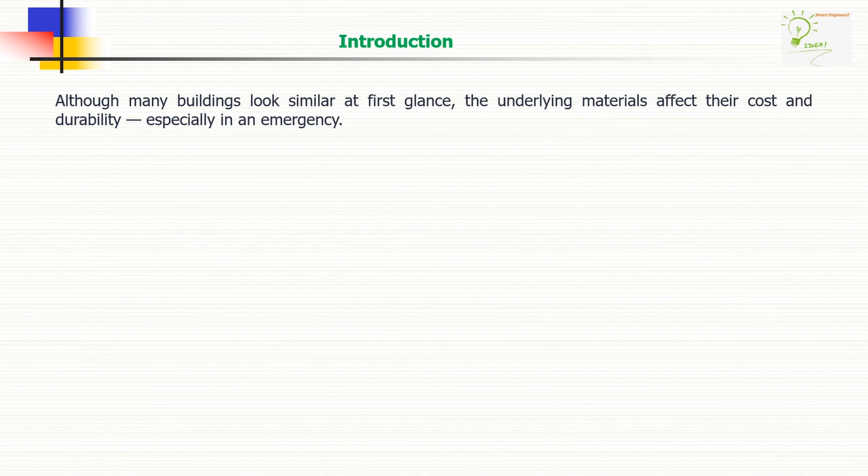Introduction. Although many buildings look similar at first glance, the underlying materials affect their cost and durability, especially in an emergency.

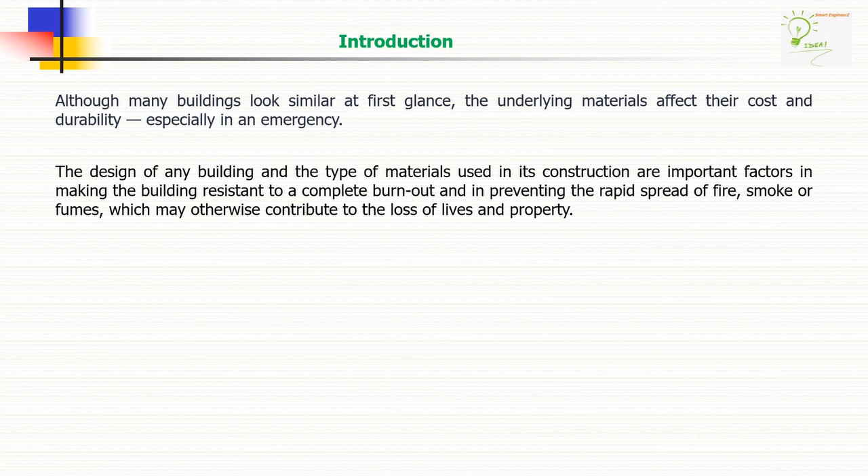The design of any building and the type of materials used in its construction are important factors in making the building resistant to a complete burn out and in preventing the rapid spread of fire, smoke, or fumes, which may otherwise contribute to the loss of lives and property.

The types of construction according to fire resistance are classified into four categories, namely Type 1, Type 2, Type 3, and Type 4 construction. The fire resistance ratings for various types of construction for structural and non-structural members should be as given in Table 1.

Indian National Building Codes, earlier 2005 and subsequent 2016 revisions, and respective Code of Practice, that is IS 1642:1989 reaffirmed 2000, classify all structures from type 1 to type 4, and this building type reveals crucial information such as fire resistance rating, that is FRR.

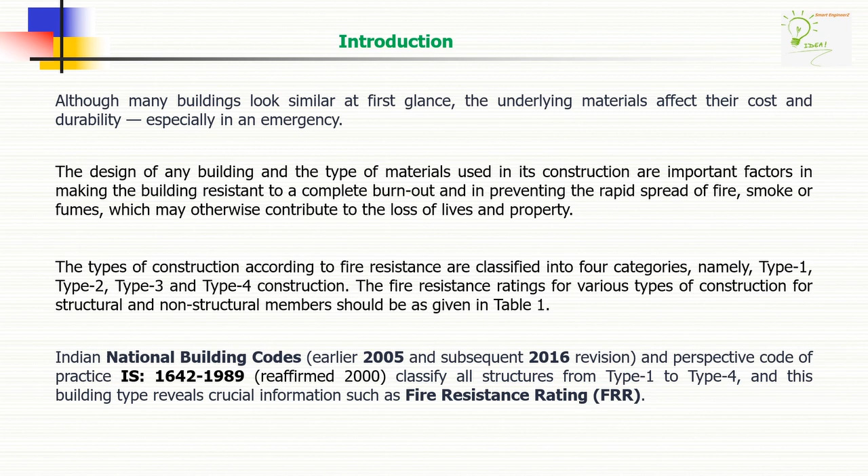This code, part 4, deals with safety from fire. It specifies the demarcation of fire zones, restrictions on construction of buildings in each fire zone, classification of buildings based on occupancy, types of building construction according to fire resistance of the structural and non-structural components, and other restrictions and requirements necessary to minimize danger to life from fire, smoke, fumes, or panic before the buildings can be evacuated.

The code recognizes that safety of life is more than a matter of means of egress and accordingly deals with various matters which are considered essential to the safety of life.

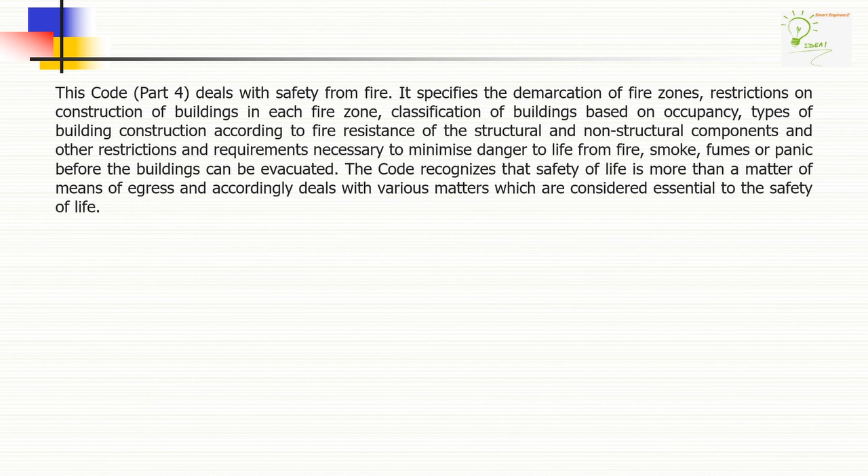But the most surprising and unfortunate fact is that though the NBC and respective code of practice has been rolled out approximately 18 years or more till date, the awareness is not there with concerned parties, that is architects, consultants, engineers, developers, and other associated stakeholders.

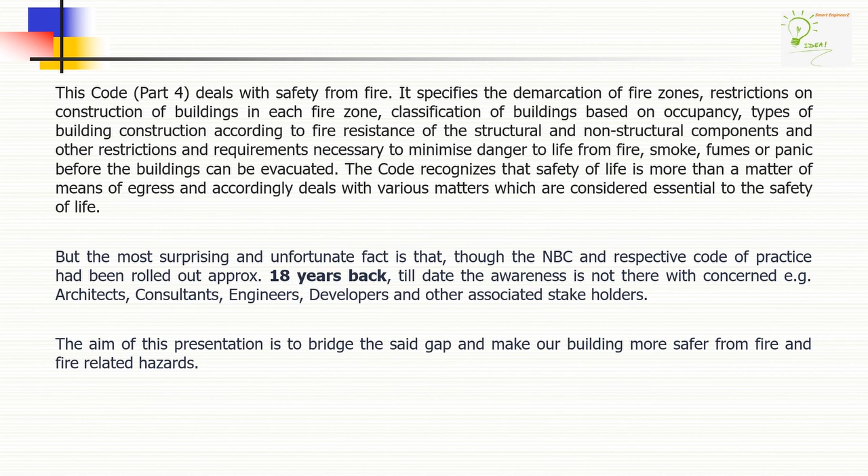The aim of this presentation is to bridge the said gap and make our buildings more safer from fire and fire related hazards.

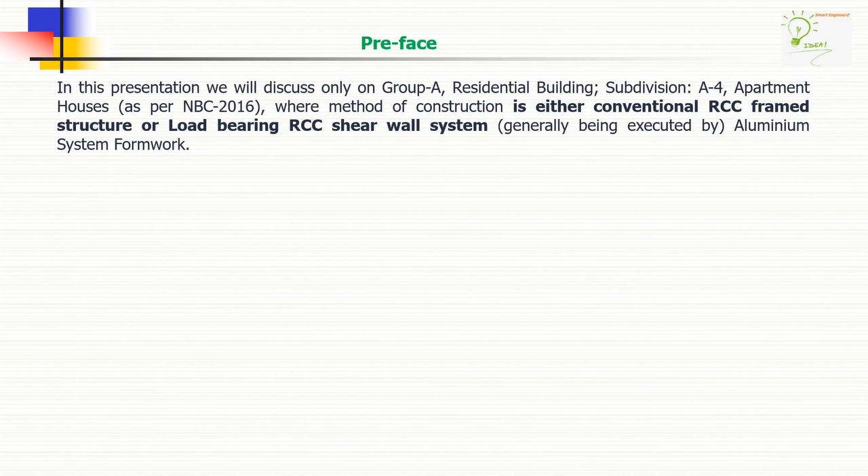Preface. In this presentation, we will discuss only Group A, that is residential building, and its subdivision A4, that is apartment houses, as per NBC 2016, where the method of construction is either conventional RCC frame structure or load-bearing RCC shear wall system, generally being executed by aluminum system formwork.

This presentation is focused mainly on the minimum dimension required for RCC structural members with their cover requirements for Type 1 construction. Other architectural, structural, building services and interiors related requirements, please follow respective sections or codes of practice.

Please note, while studying, few anomalies observed between above references. However, preference given to NBC 16 over other codes of practice.

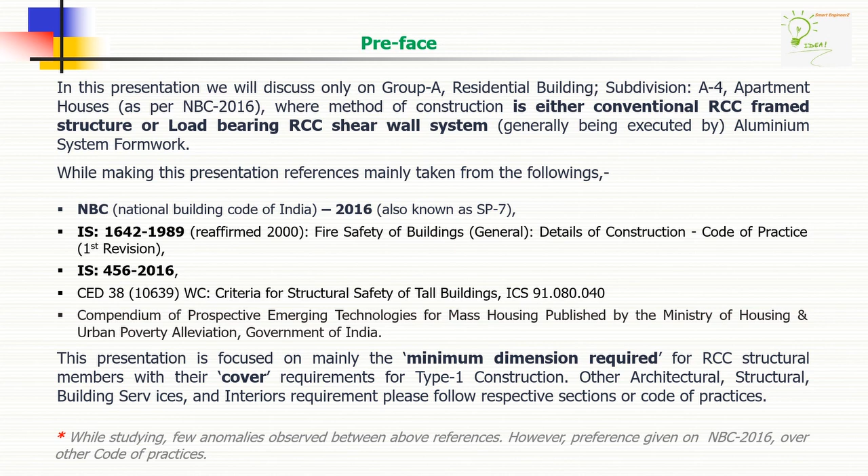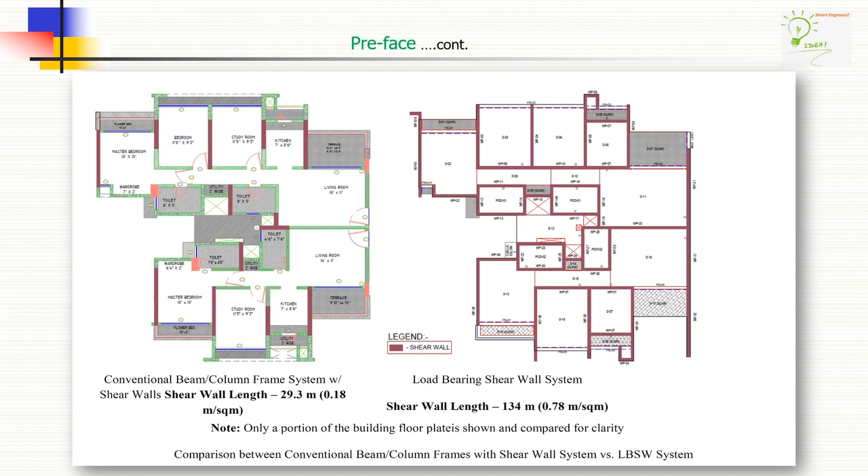Here you can see a pictorial representation of comparison between conventional beam column frames with shear wall system versus LBSW system, that is load bearing shear wall system.

These are the two relevant codes in our country, NBC 2016 and IS 1642, reaffirmed 2000.

Classification of buildings based on occupancy. All buildings, whether existing or thereafter erected, shall be classified according to use or the character of occupancy in one of the following groups.

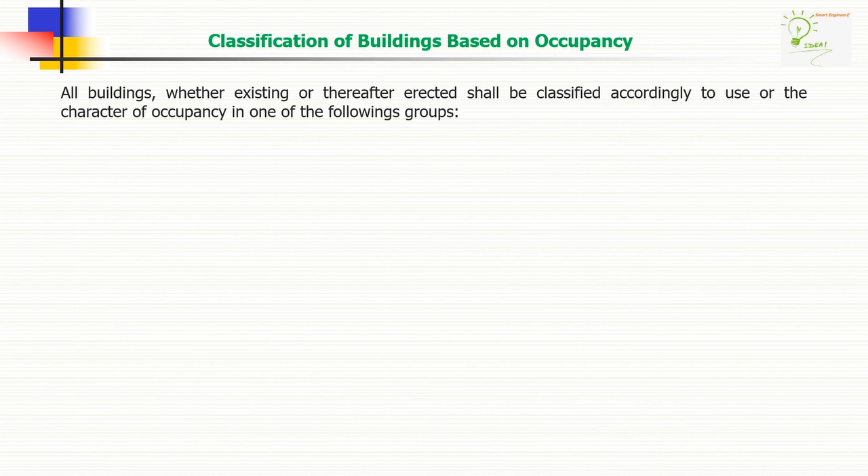Next, it comes fire zones. Demarcation: the city or area under the jurisdiction of the authority shall, for the purpose of the code, be demarcated into distinct zones based on fire hazard inherent in the buildings and structures according to occupancy. Please refer section 3.1 of NBC 2016, which shall be called fire zones.

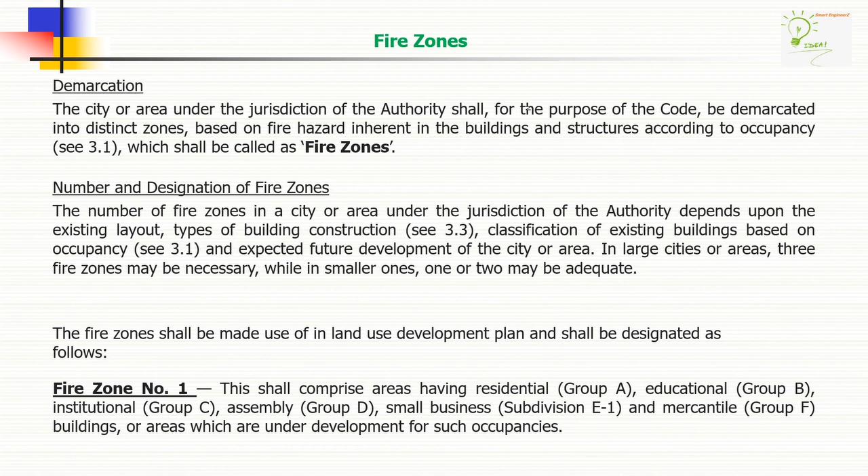Now let us understand the number and designation of fire zones. The fire zones shall be made use of in land use development plan and shall be designated as follows: fire zone 1, fire zone 2, and fire zone 3.

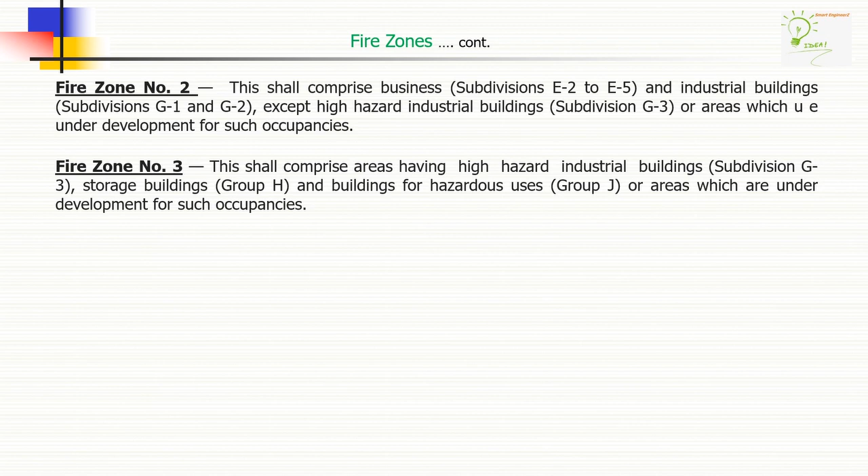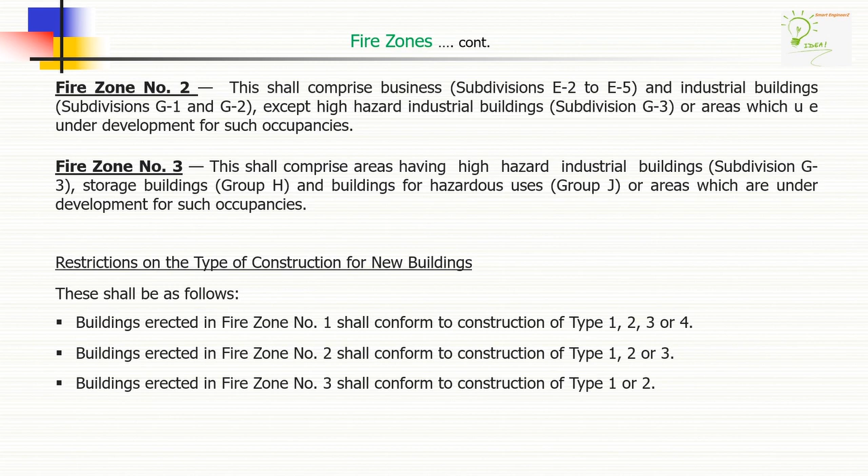Restrictions on the type of construction for new buildings. These shall be as follows: type of construction.

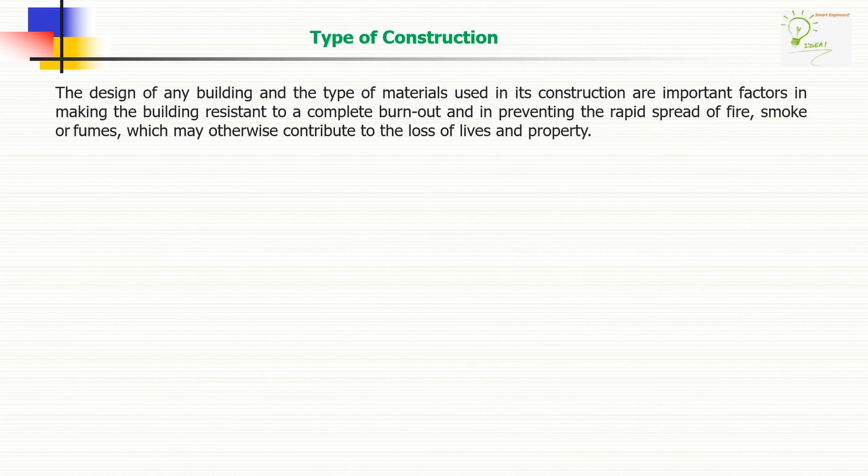The design of any building and the type of materials used in its construction are important factors in making the building resistant to a complete burnout and in preventing the rapid spread of fire, smoke, or fumes, which may otherwise contribute to the loss of lives and property.

The fire resistance of a building or its structural and non-structural elements is expressed in minutes against a specified fire load, which is expressed in kilocalorie per meter square, and against a certain intensity of fire.

All buildings shall satisfy certain requirements which contribute individually or collectively to the safety of life from fire, smoke, fumes, and panic arising from these or similar causes.

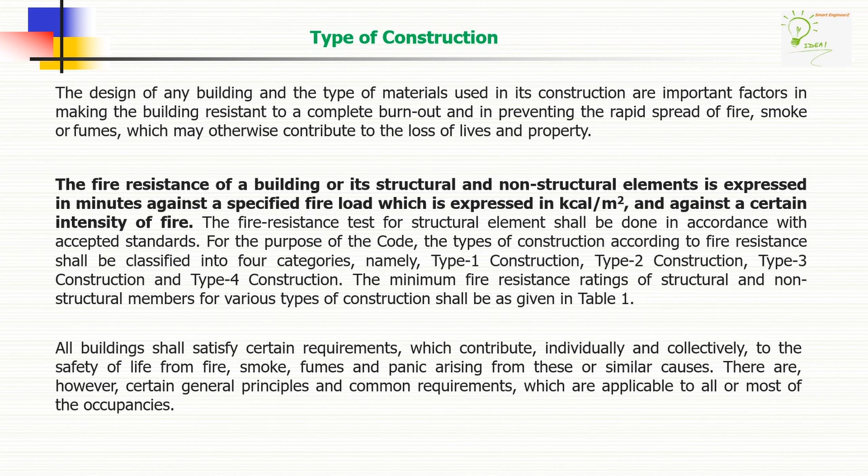Here, as you can see, for residential building facing one public street at least 9 meters wide and having FAR more than 2, should be Type 1 construction.

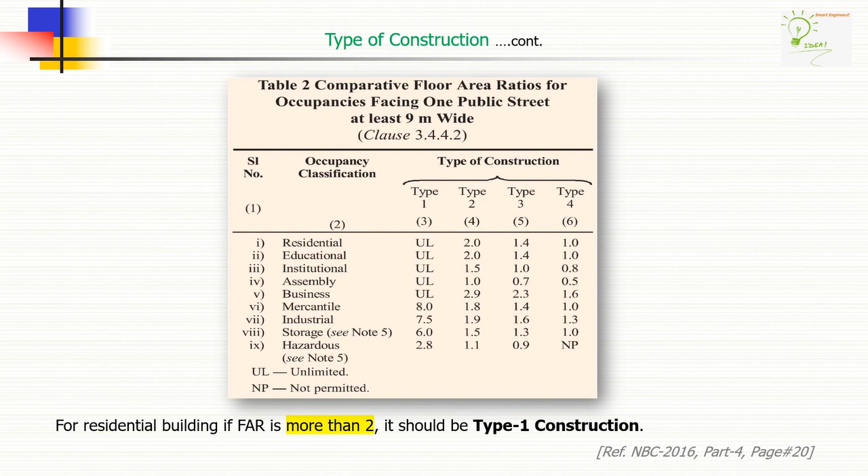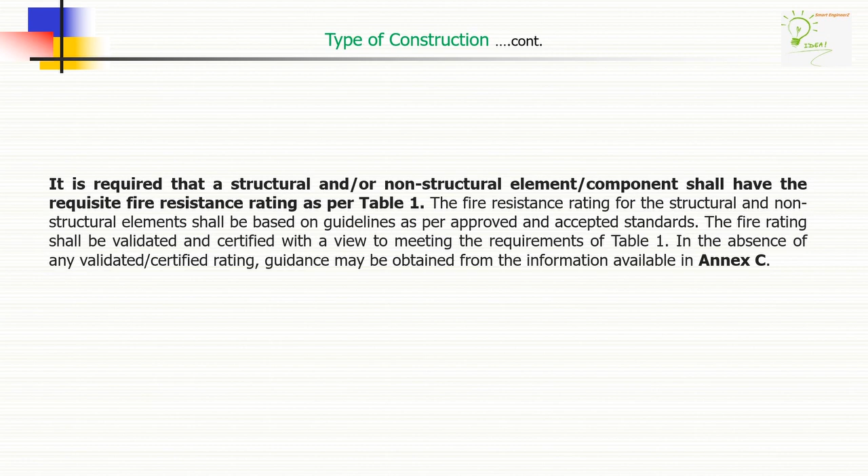For Type 1 construction, it is required that a structural or non-structural element or component shall have the requisite fire resistance rating as per table 1 furnished in NBC 2016. Apart from that, for other requirements, please follow respective sections or codes of practice.

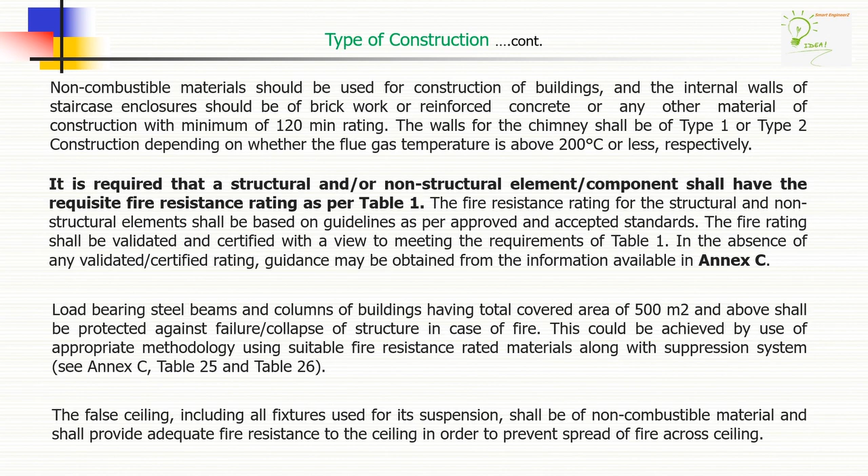Here it is table 1, the fire resistance ratings of structural and non-structural elements. Please go through in detail.

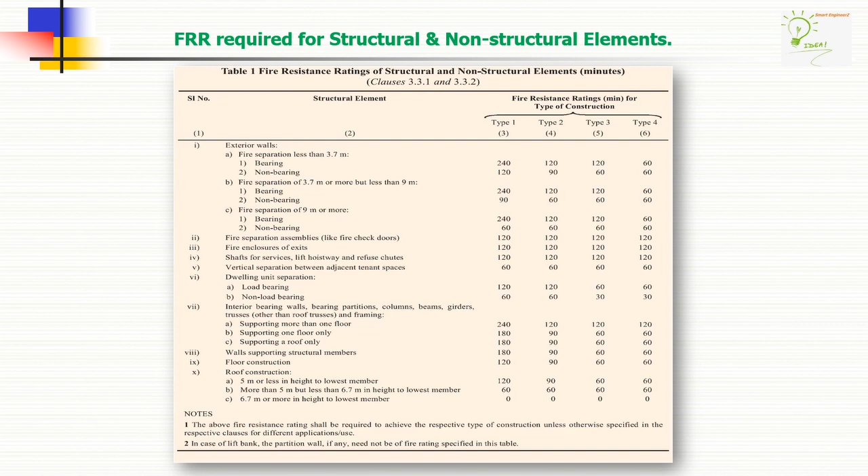Now, as a gist, we can say in case of Type 1 construction, having fire separation of 9 meters or more, following minimum fire resistance rating needs to be adhered to.

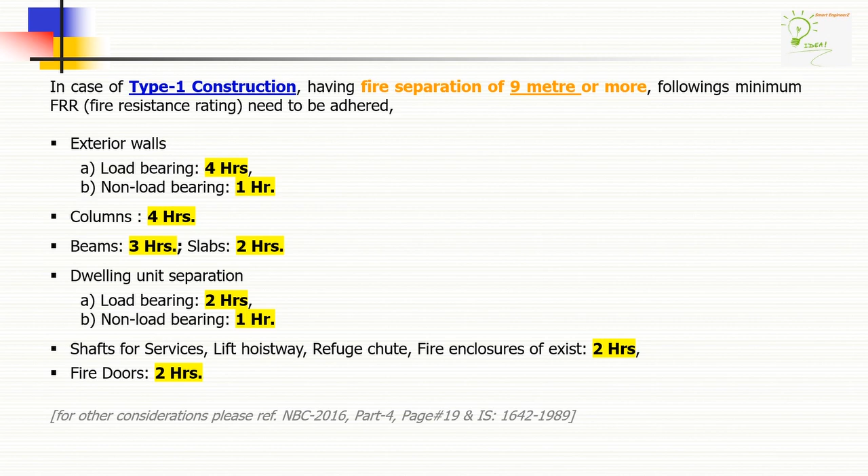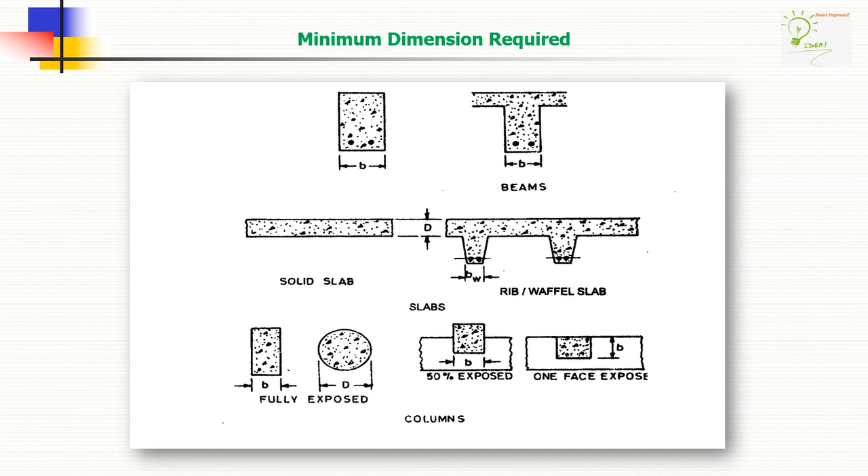Minimum dimension required for beams, slabs, columns, shear walls, etc. Further details.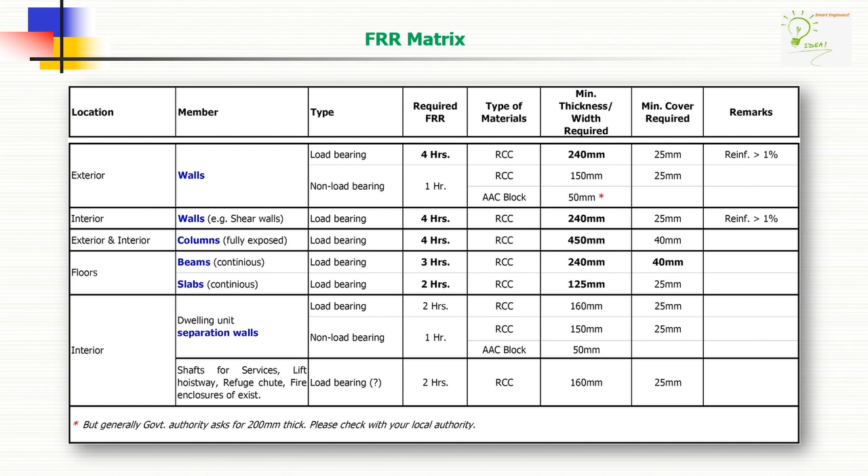Architectural issues, case study. Now, once we got acquaintance about Type 1 construction and proceed for its design and execution, following few issues may crop up in project sites.

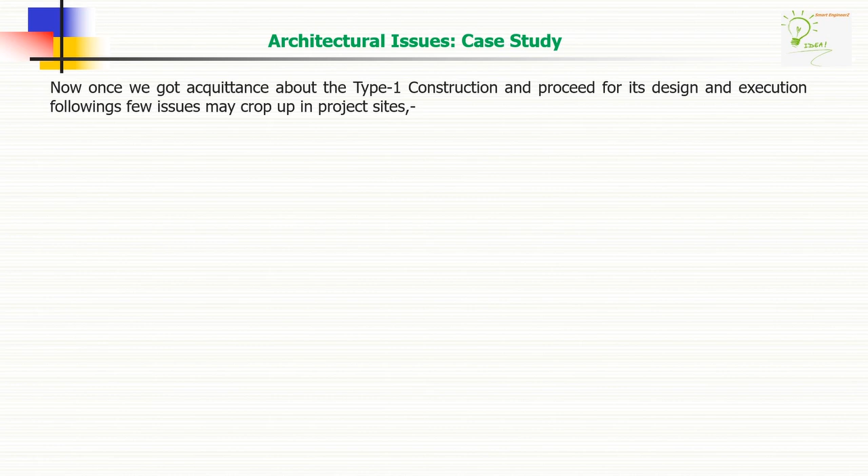Case study 1 for conventional column beam frame structure. Please go through in detail.

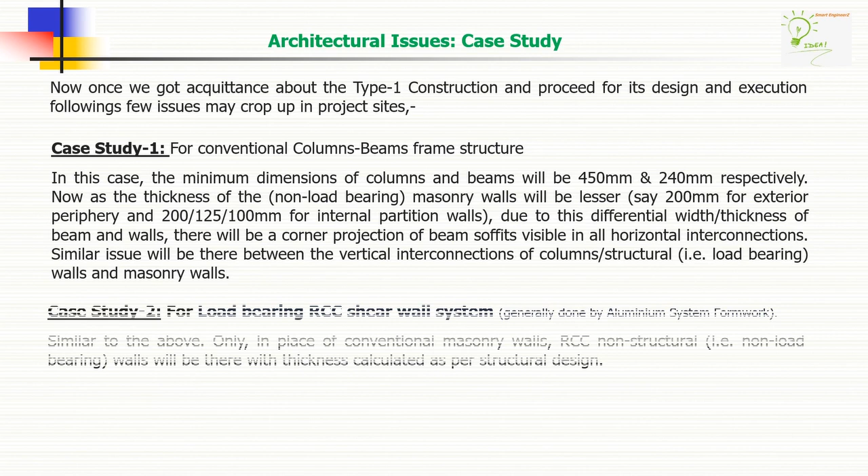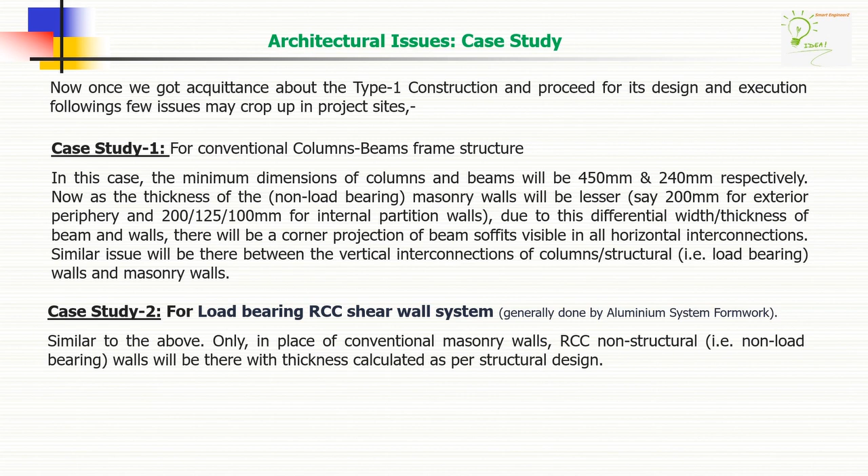And then case study 2 for load bearing RCC shear wall system. A pictorial representation furnished here.

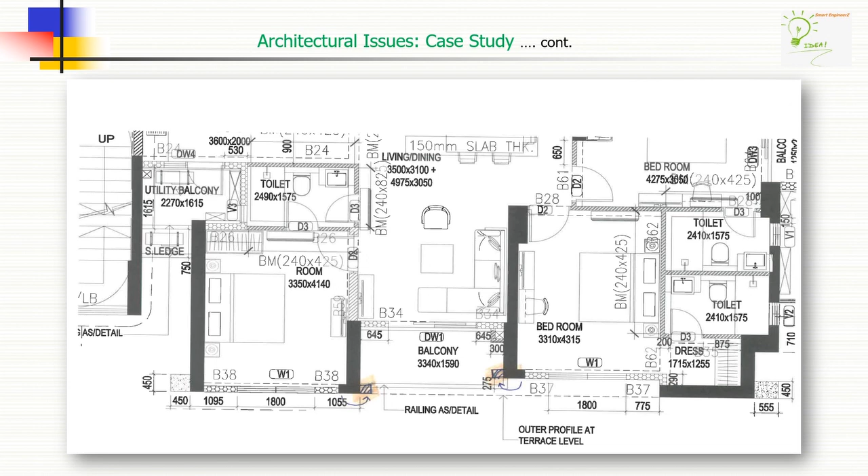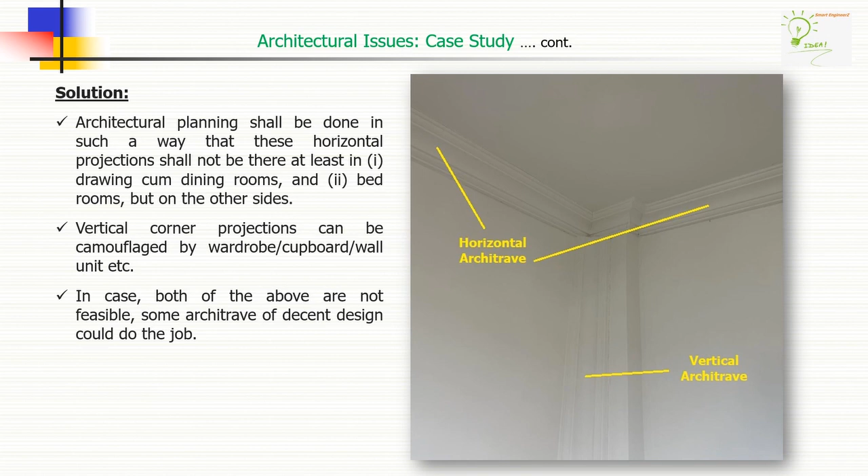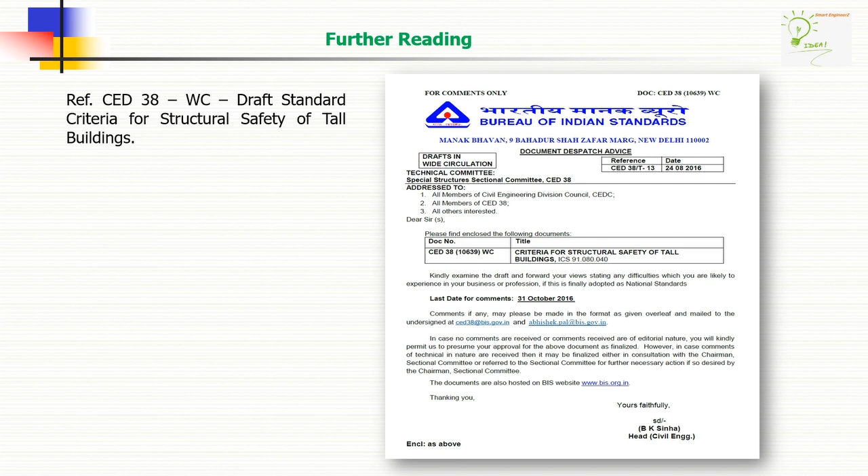And now a solution of these kind of issues. Further reading, you may refer CED 38, Draft Standard Criteria for Structural Safety of Tall Buildings, for your further upgradation.

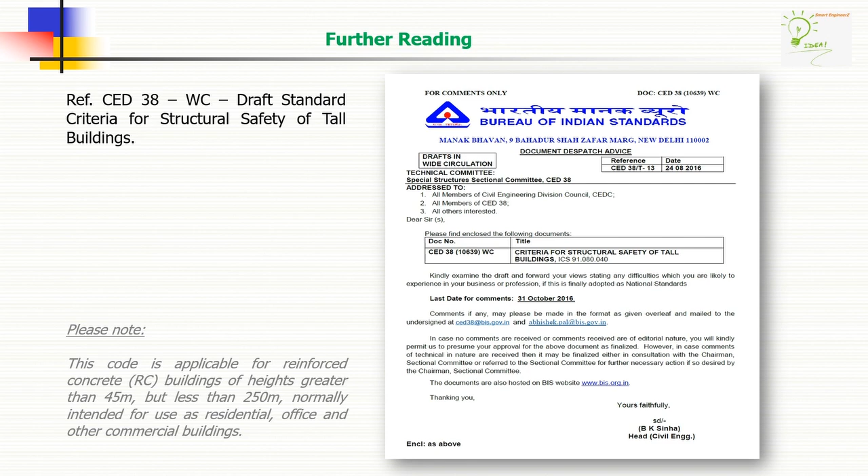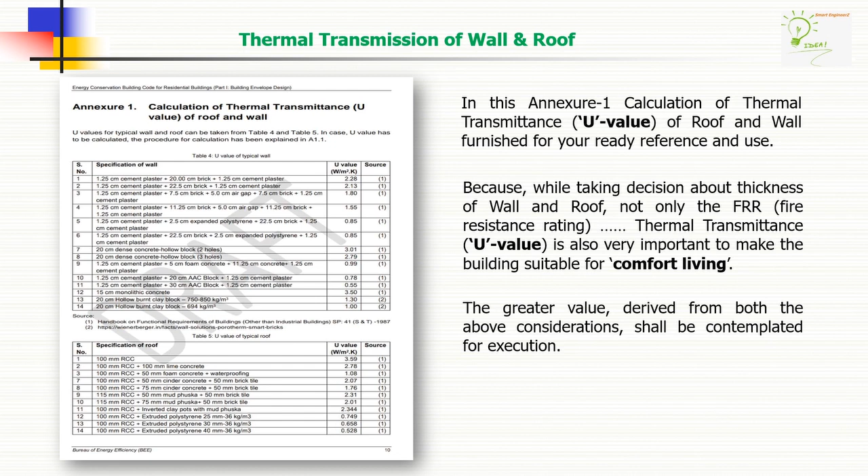Now few commentary had I had researched on this particular subject matter.